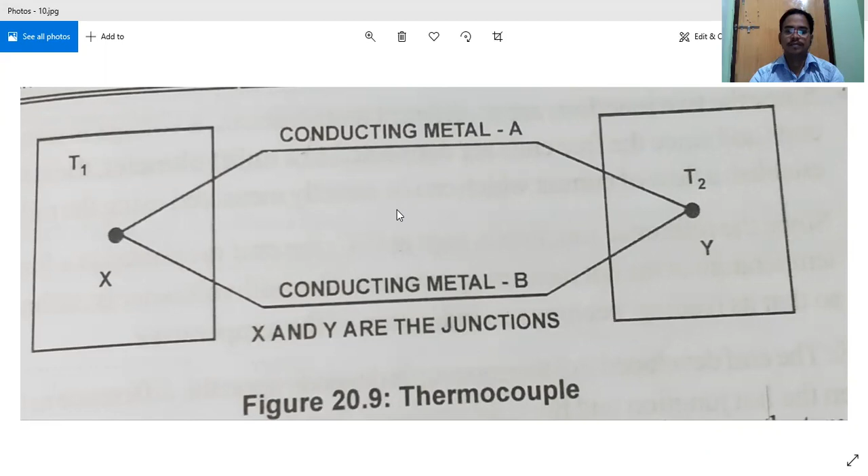We find the voltage in this millivoltmeter, and depending upon its magnitude, the temperature is calibrated. The hot junction is kept in the place whose temperature is to be measured, and the other is the cold junction, which is known already. Then, depending on the voltage developed here in millivolts, the temperature of the hot junction is calibrated.

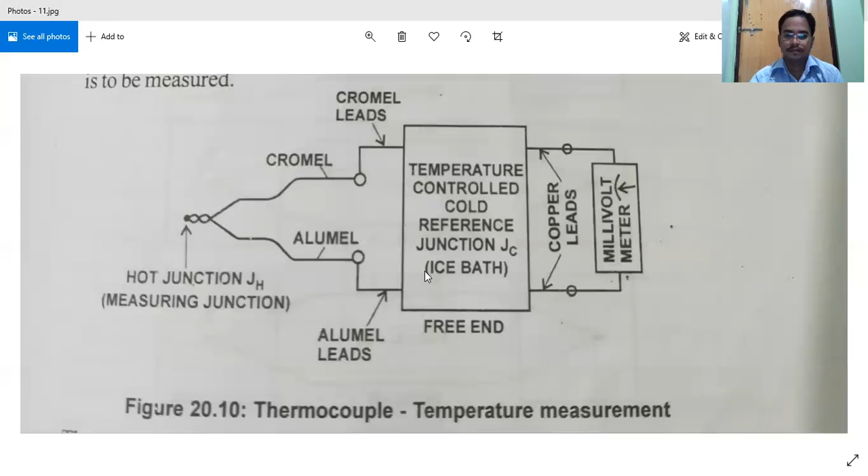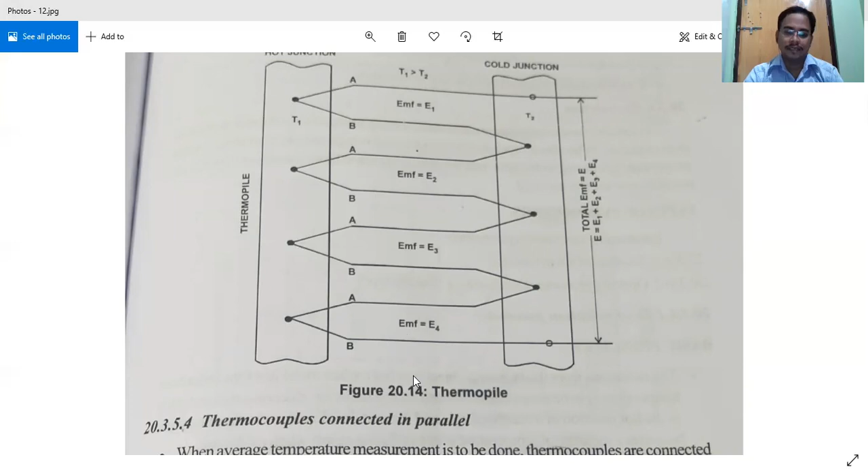The cold junction is maintained at a constant temperature under our control, and the overall EMF is the summation of all the EMFs, E1, E2, E3, E4. When you add them, you get n times E when all EMFs are the same. But if E2 is different from E1 or E3 is different, then we can say a temperature difference exists. A thermopile is the arrangement of thermocouples in series to find temperature differences.

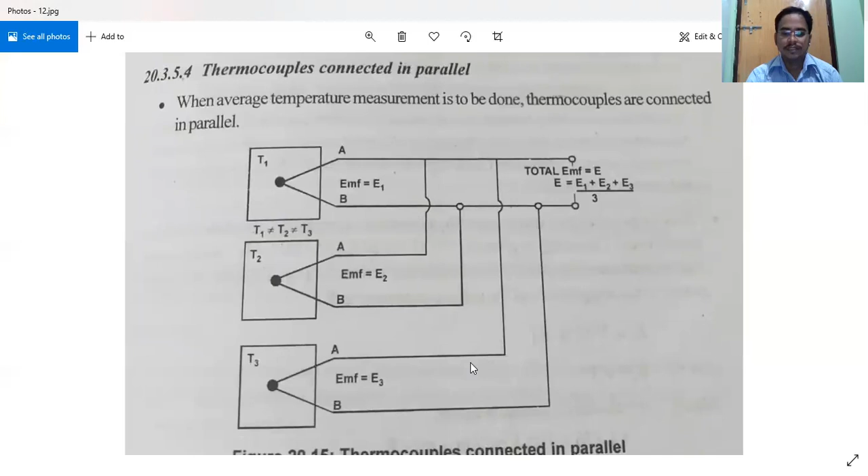Next, the parallel arrangement. The parallel arrangement of thermocouples is used to find the average temperature of the given area where we place them. When average temperature measurement is to be done, thermocouples are connected in parallel, so the EMF is averaged and E is calibrated. For the average temperature, E1 plus E2 plus E3 divided by 3 equals E, because there are 3 thermocouples. If there are n thermocouples, it is E1 plus and so on to En, divided by n.

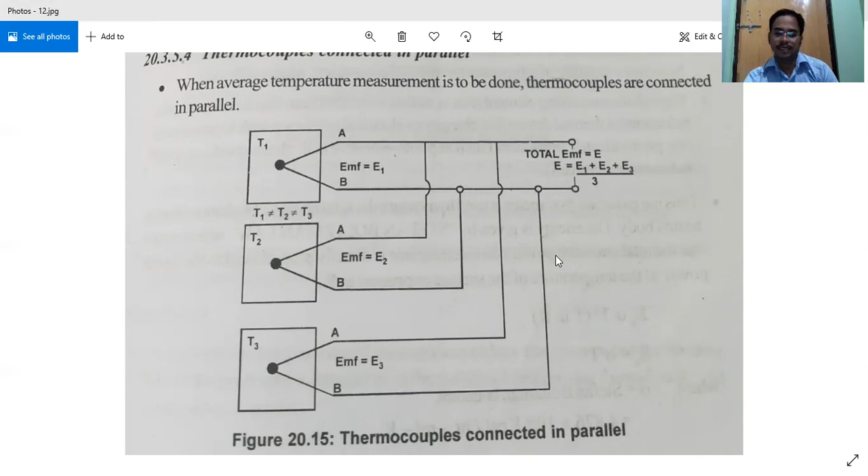The next topic is pyrometers. How many topics have we completed? We have seen a mercury in glass thermometer, bimetallic thermometers, helix bimetallic thermometer, spiral bimetallic thermometer, pressure thermometer, that is fluid expansion type, pressure type thermometer, resistance thermometer, thermistors, thermocouples. Now, pyrometers. In pyrometers, we have two types: total radiation pyrometer and optical pyrometer.

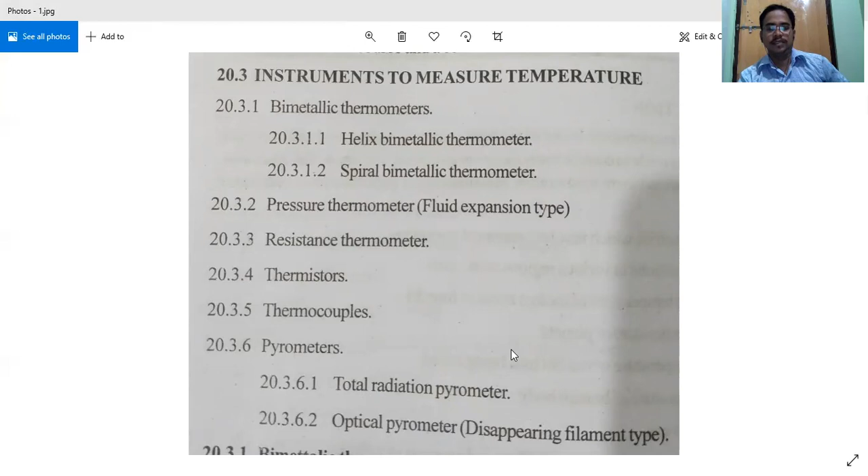The range is very high. It is around 3000 degrees Celsius, or it may be higher also sometimes. Or you can also find out the temperature of very high temperature sources, like the temperature of the sun, or the temperature of the stars, that can also be determined.

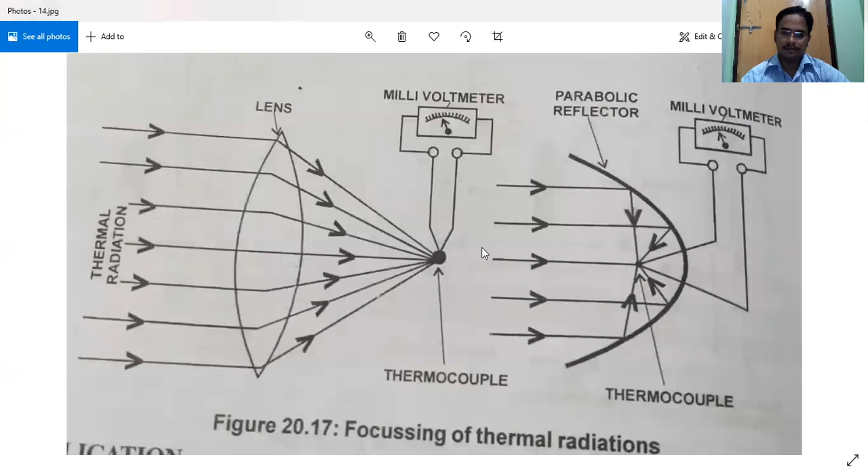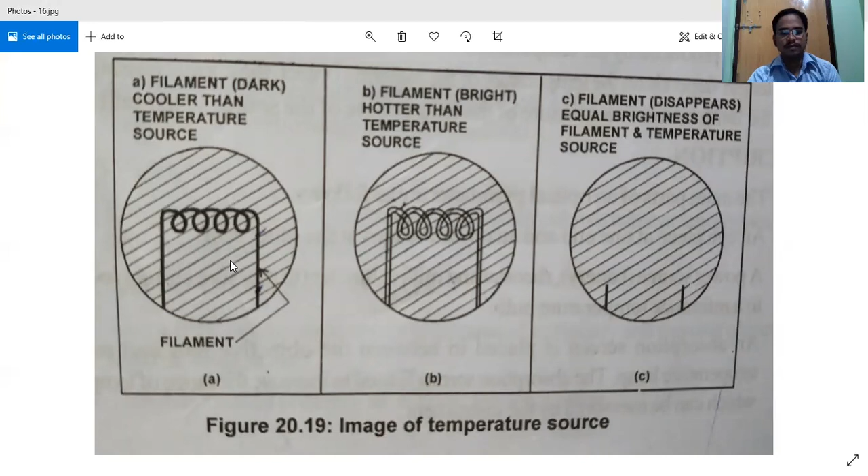When this happens, we should adjust the current supply to the bulb such that we cannot see the coil inside the bulb. It should disappear. It means that the temperature of the coil and the brightness from the outside source are the same. So in such cases, we should record the current, and it is calibrated to determine the temperature of the source, with some limitations or calibrated values, you should give the temperature of the source.

So the thing is, first we supply the current. If the supplied current is very high, this will be brighter. If it is less, it is darker. If the radiation intensity of this bulb and this source is the same, at that situation we cannot see the filament coil, and that current is recorded and calibrated for the temperature of the source. So this is how the optical pyrometer functions.

Now we have applications. Optical pyrometers are used to measure temperatures of molten metals, same for the previous one and this one. The temperature of the furnace, the objects which are highly luminous, can be determined by using optical pyrometers.